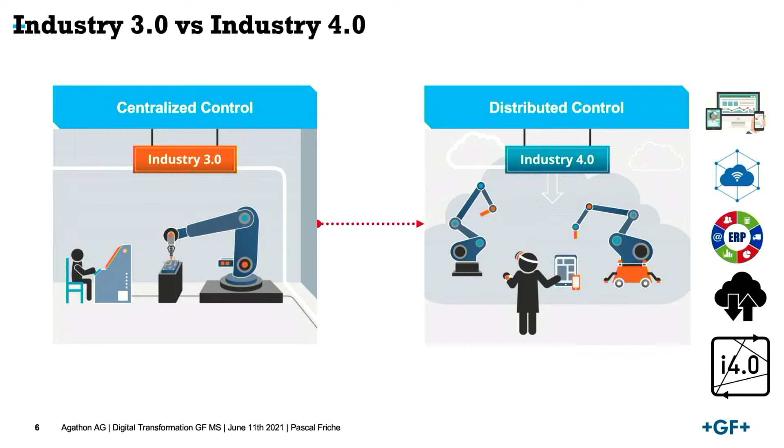To do that, we need, of course, to develop something. We need to have a transformation. So how do we stick to that, and how did we realize this transformation? We follow the norm RAMI, which is Reference Architecture Model Industry 4.0. The norm has been built in 2015 with 3 axes.

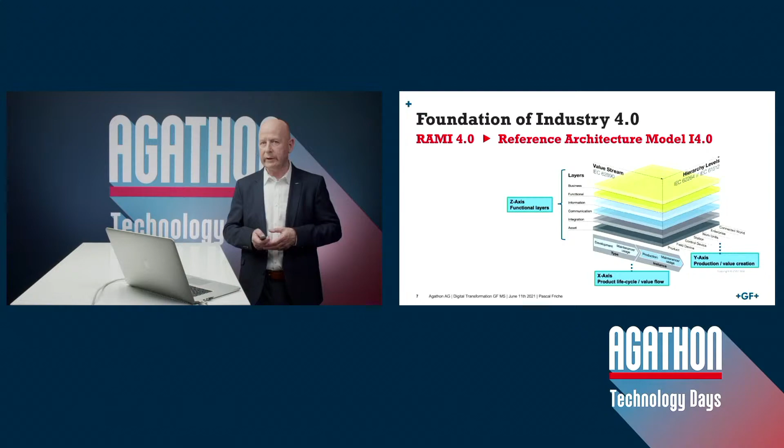We have on the Z-axis the functional layer, which is very important to GFMS. On the X-axis, we have the product life cycle. And on the Y-axis, we have the production axis. The functional layer helps us to build our IIoT stack. IIoT stands for Industrial Internet of Things. This is the architecture that we need to push data from the machine level up to a business application level.

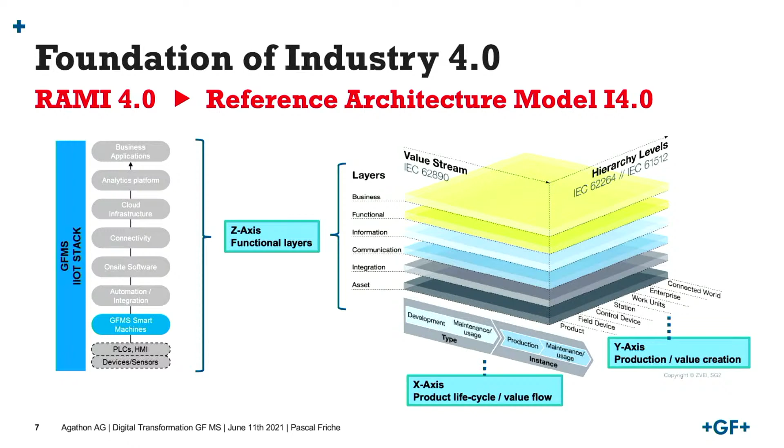When you build a house, you need a strong foundation. And GFMS did exactly this path. So firstly, we integrated on every single machine from mid-2017 what we call an rConnect box. Secondly, we moved ahead with a data standardization across all our technology, which makes GFMS unique in that sense. We chose OPC UA, which is a well-known format.

On top of that, the smart devices and smart sensors are also part of the game of the digital transformation. These 3 aspects make our machine smart and Industry 4.0 ready. What are the benefits for you, customers? First of all, the box inside our machine allows the customer to have an open connectivity and to connect his machine to the world. Secondly, OPC UA as a norm helps us to simplify the interface.

The smart devices and smart sensors are there to have real-time analysis. And of course, every customer who is using our technology would like to have a return on investment. And the data management and getting the data are the basis.

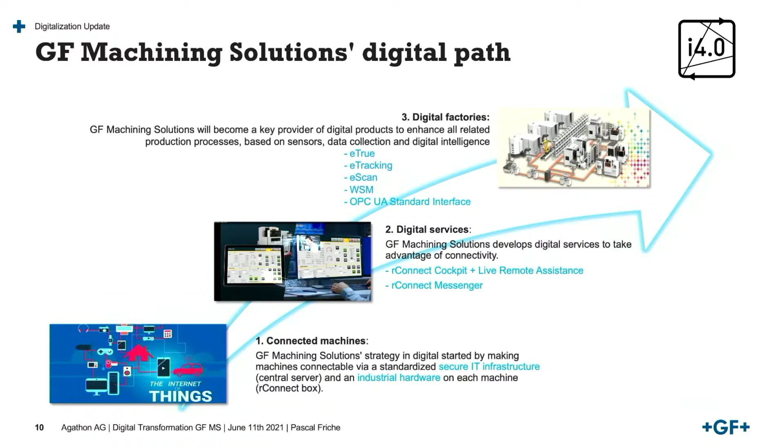When a customer is investing in our technology, it's a lot of money. And they would like to ensure better efficiency, to ensure the productivity. So how can we improve and increase this efficiency and productivity is most probably to understand how the machining is behaving. And how the machining is behaving, this is translated from the data analysis that the customer will use.

We do have 3 pillars in GFMS regarding the digital customer service, the augmented machine capabilities, how can we have capabilities from the machine that our customer purchased, and finally, how can we have a process integration and an optimization on those processes. And this is exactly what the software is delivering to our customer.

Let's talk about the digital services. How the mechanism and the solution work for our customer. The customer, in his own factory, can, through his intranet, have a customer cockpit. This customer cockpit offers some features to the customer. First, to get directly online with the HMI, the control panel of the machine, to be able to tune and to set some parameters. Secondly, the customer cockpit offers also to transfer files. For example, CAD/CAM files, firmware, software upgrades that may be needed.

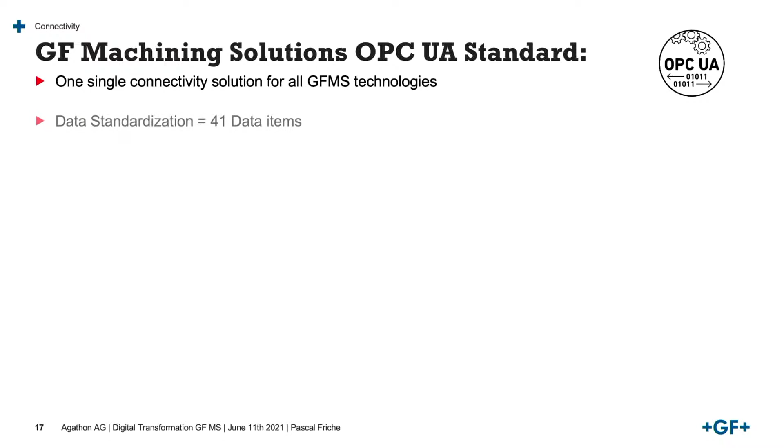As you can see, we have many different possibilities to connect the machine to diverse systems. And finally, what I would like to show you is that we deliver 41 data about machine identity, machine status, process information, error messages, and KPI measurement.

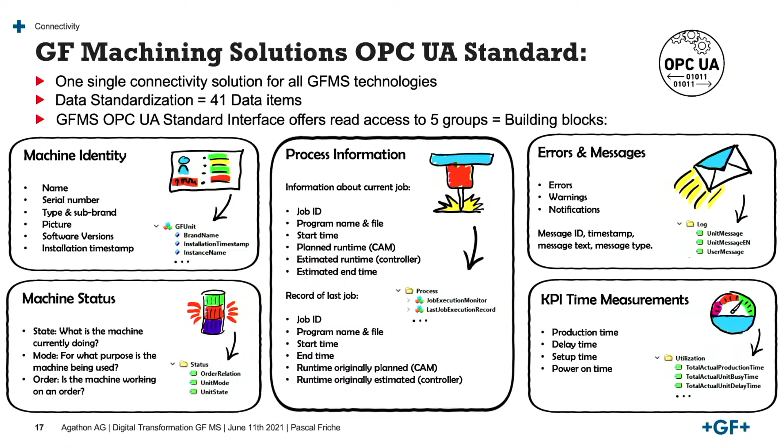As a wrap-up, the customer is looking for process accuracy, reduced lead time, to be compliant, fix the problem as soon as we can, integrate quality control, connect to MES or ERP systems, monitor the machine performance. This is just a summary of what you as a customer are looking for. So GF Machining Solutions is offering that, the connectivity; data are the new gold today, and everybody knows that. Then collaboration with cloud platforms.

This is the future for us as well, to offer web-based access. Servitization, the service becomes more and more important. Then the augmented machine capabilities, how can we twin that? And finally, to be also in the intelligent manufacturing world.

Our applications. Today we have a lot of possibilities to do nice things, so we can play with colors, with hot and warm colors. Then we have design, or production for jewelry. So you see the different processes we have, from small parts to large parts, like cockpits in trucks.

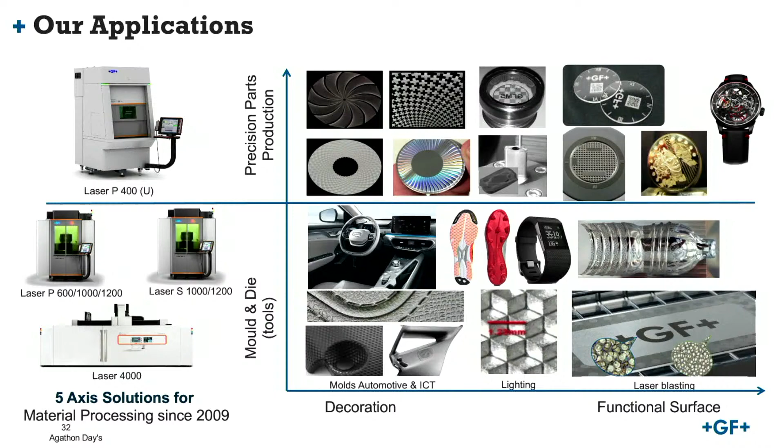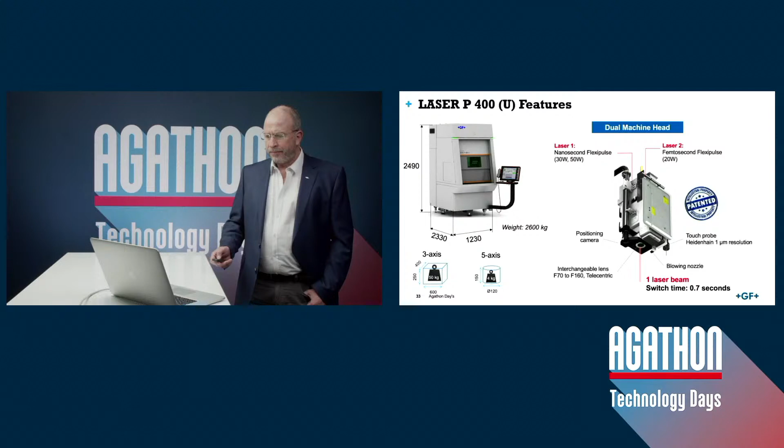On the Laser P 400U, for example, we have the dual machine head. It's a nanosecond source or a femtosecond FlexiPulse laser, and we have the possibility in the same process to switch from one source to the other in less than 1 second. We try to listen to the market, we want to be innovative. Our customers have to be innovative. We have special needs, for example, also in the optical market.

When we program some structures for the parts, we have several possibilities. If we go for 2 and 3-axis, we go directly with our CAM system Rhino 3D direct to the machine. If we have round parts or 5-axis parts, we go over the laser simulation so that we know exactly what happens when the machine is finished.

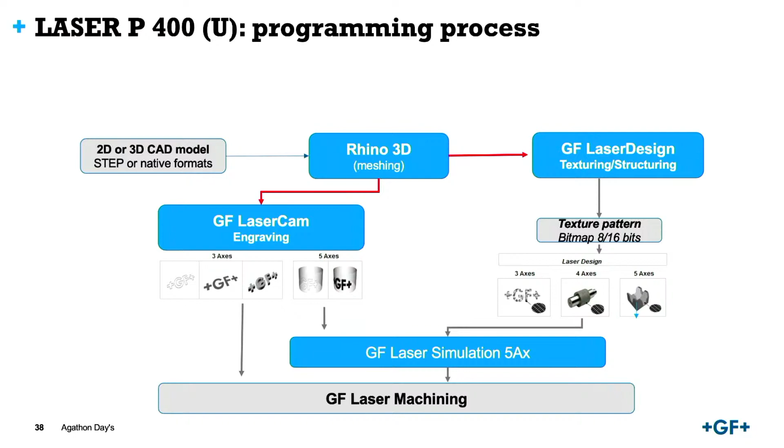Here are examples of the CAD data. Then we have the possibility to say which structure we want on which part. Then we go over to simulate. We have patch sizes. The patch is a very good system so that we have the part not split. If we move with the laser source in mechanical parts, we have to stop the process a little bit. And if we stop the process in the middle of a patch, it's not nice on the surface. So with the patch size, we have all parts exactly as we want. And then we make the simulation and go to machining.

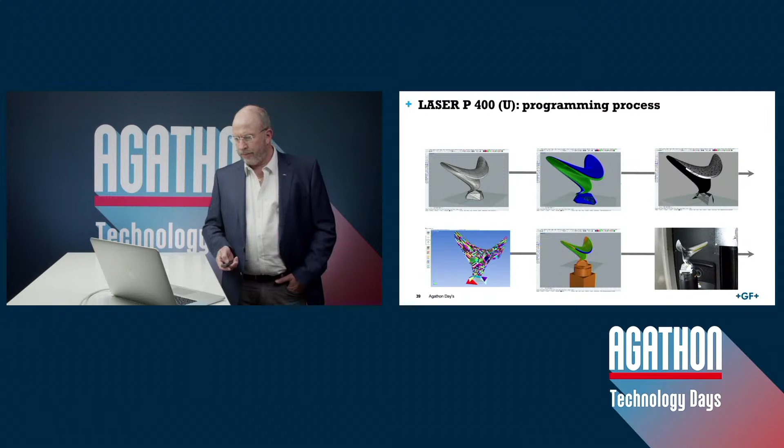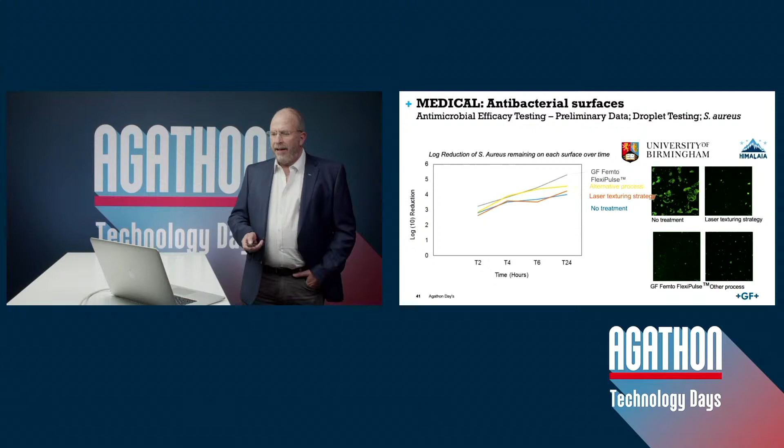All our laser machines also have pick and place automation with pallets or part by part. In medical, we have antibacterial surfaces. What's possible to produce: we have surfaces with no treatment, so it looks like this. You see the bacteria. Then you have competitor products, and our products with FlexiPulse. You see fewer particles on the surface, so it's very good for the implants.

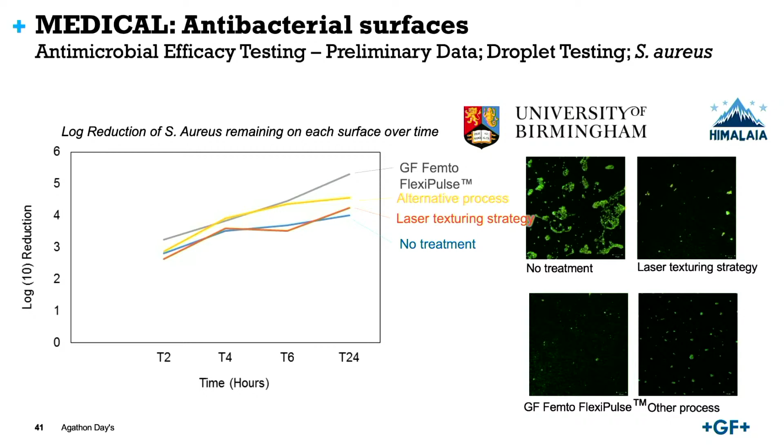A next thing is also to make an identification right in the part. You know sandblasting; we make laser blasting, and in this laser blasting we have the possibility to integrate some QR codes, some descriptions like the logo you see here. And it's only visible with a special application.

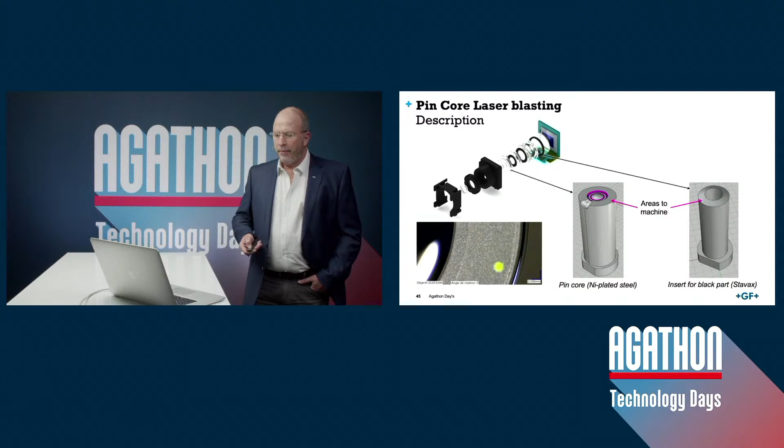Everybody has this part in the pocket: the camera of the mobile phone. The lens for the camera, for the zoom, is a very, very small part. So you see the possibilities we have to change, from every color to the size, big size, small size. And with our machine, we laser the marked areas, and this area has at the end a structure like this. It looks like sandblasting, but is laser blasting. If we look at the surface, the sandblasting surface looks like this. And if we do it with our machine, the structure is very homogeneous.

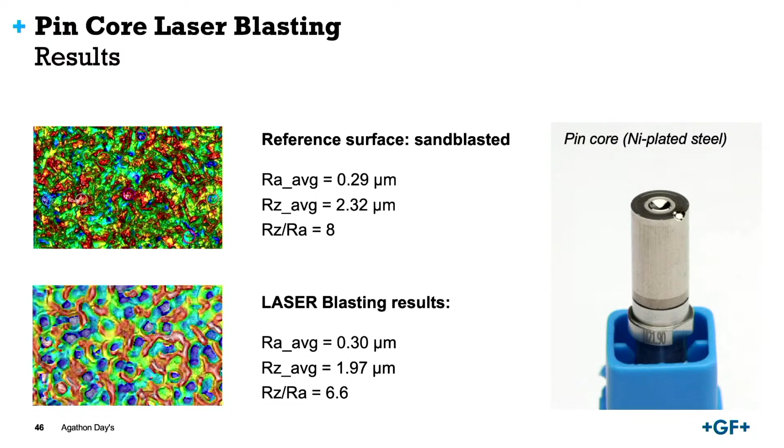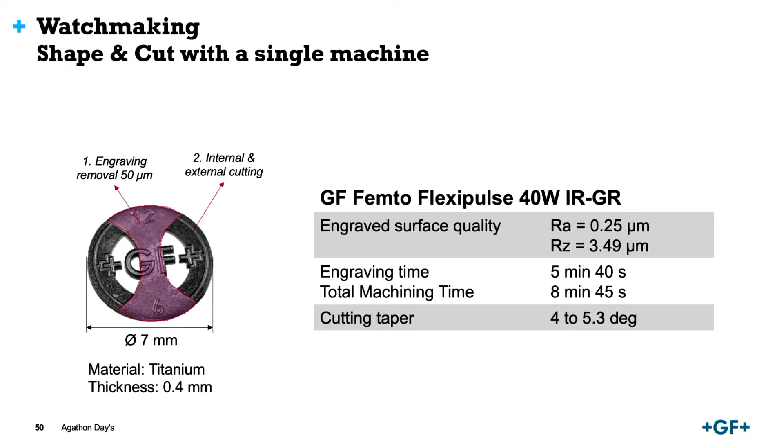With the machine, we also have the possibility to cut. It's not the first thing to do with this machine, but we have the possibility: here a part in titanium, and also a part in material from the jewelry industry. You see we have a depth of 50 microns, and we have straight walls with a cone of 5 degrees. Laser microcutting we do with our ML5 from Microlution. It's possible to cut within plus minus 1 micron and realize surface qualities below Ra 0.1.

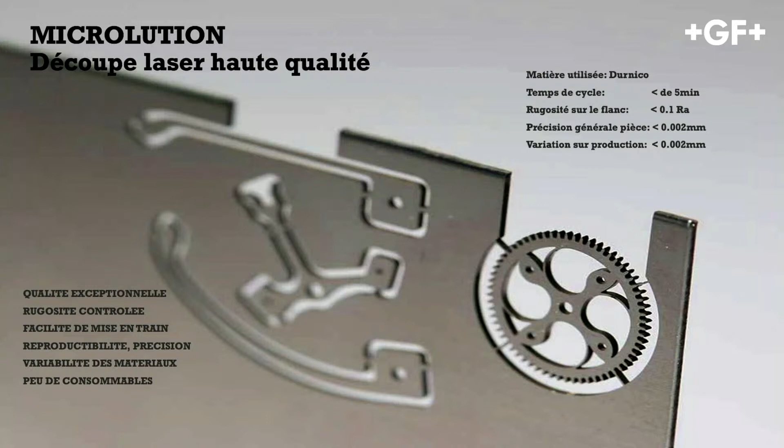A next machine type is additive manufacturing. We do this in GF Machining Solutions with the DMP Flex or Factory. Flex is for different materials, so you can easily change the material, the powder, while Factory has integrated cleaning of the powder, and we work on these machines with only one single powder. DMP 500 or 350 refers to the build space, the part size.

What's possible? Four challenges. The first is weight reduction. It's nearly impossible to cut, mill or grind, so we have the possibility to produce parts like this. Or lead time reduction: here we have a part with additive manufacturing, we are below 1 day, below 3 days, and normally it takes over 3 weeks to produce such parts. Function optimization is a possibility with this process, or mold improvement, heating and cooling with channels inside the form.

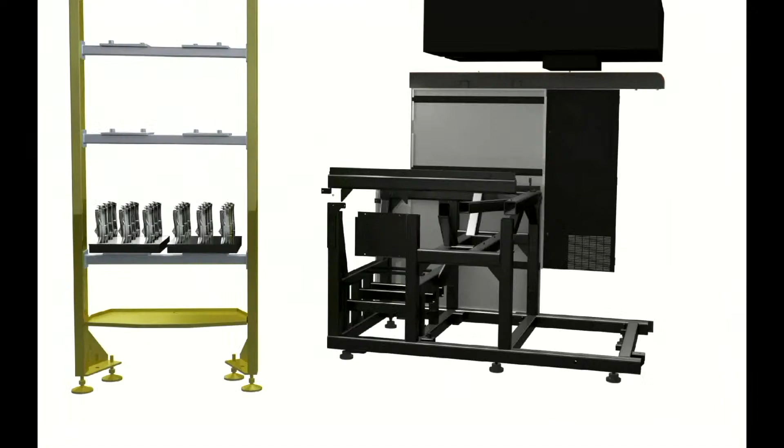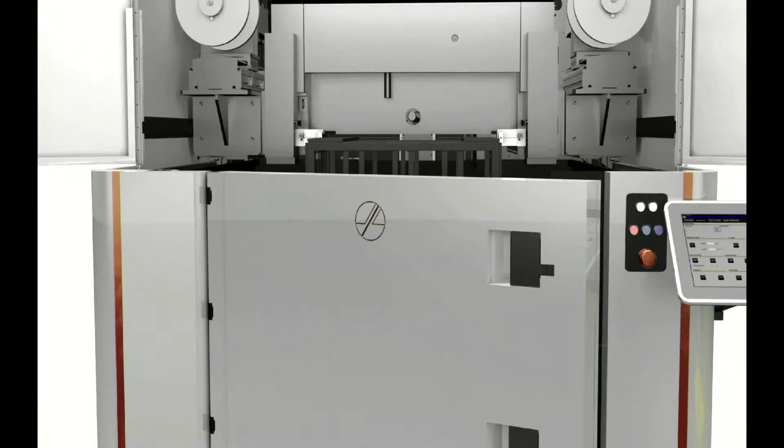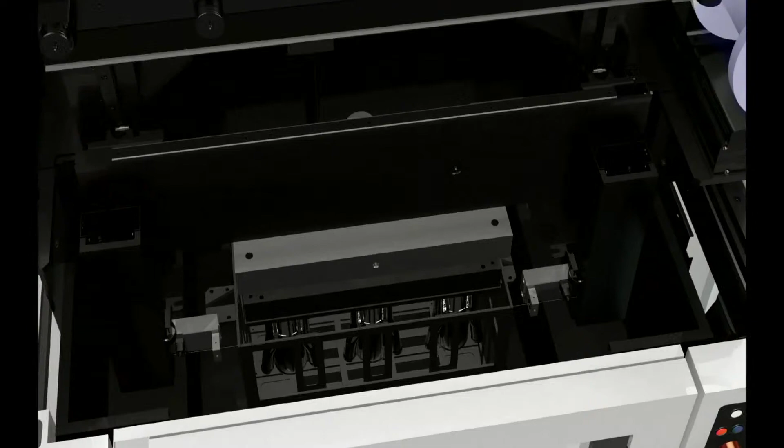The CUT AM500 is the machine to separate the parts we produce in additive manufacturing from the base plate. Every part is fixed on the bottom, and you have different possibilities to remove it, with a saw or by breaking, but it's always mechanical deformation, and it's not so good for special parts. So we put a cord over the parts, turn it around, and then cut the parts from the bottom with wire erosion.

I move over to EDM and EDM generators. So the two factories, Charmilles and Agie, produced these generators for a long time, and they grew up, so the speed was faster, and we went together into the development of generators in 2010, and then with the Tomeo generator we have the possibility to make the spark track.

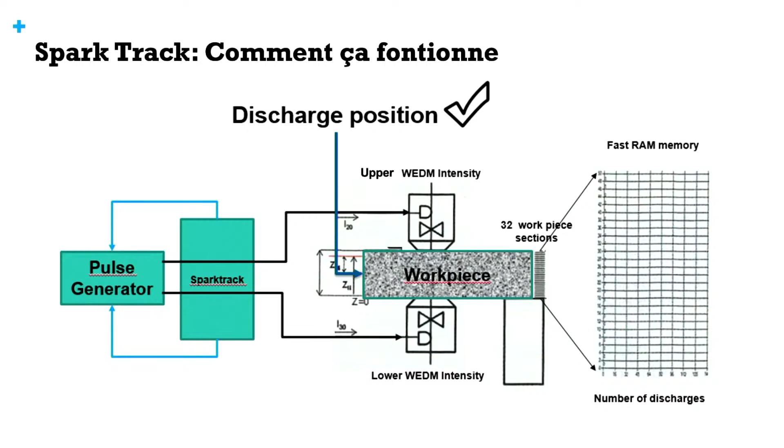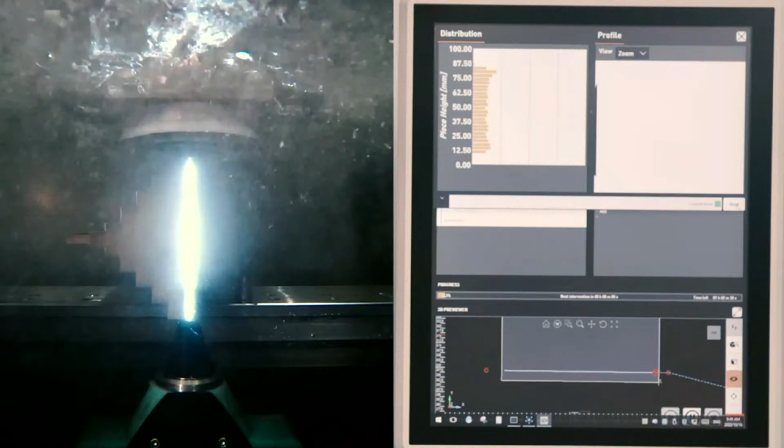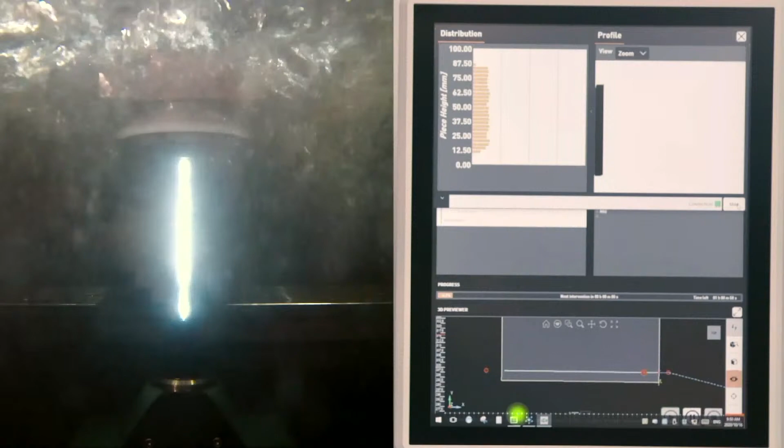Spark track, so we know exactly where the spark is jumping from the wire to the part. So with the spark track, between the pulse generator and the part, we know exactly where the spark is jumping. So we split, for example, the part in 32 levels, and then we can know exactly where we are. You see the part has different heights, and always big problems with broken wire. You see on the right side where we actually cut, and we have the part in real time too.

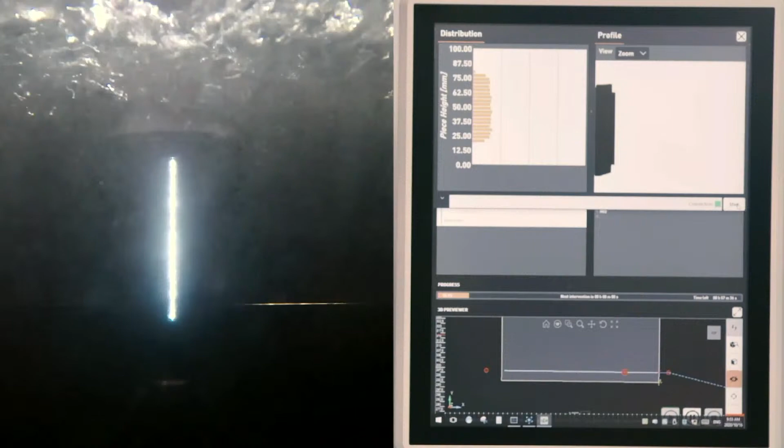And we have full power speed all the time, and the machine knows exactly when it has to take back the power to the wire. So you see the first level is done, and the machine is running with the same speed but with less power. You see it here. For every single part, we have the possibility to know where we are.

For example, this one was a test, but this one is real time, a real part. So you have these sections where you have to be very careful with the inserts, with the power, with the wire, so that you don't have broken wires.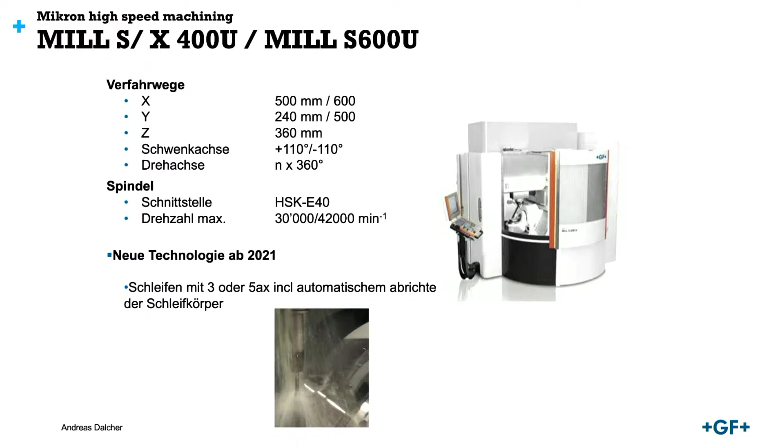A last thing is the milling. In milling, we have the Mill S and Mill X series. And the newest option we have this year is also grinding. Grinding of products directly on the milling machine is coming to sales in Q3, Q4 this year. So we also have the possibility to adjust the grinding body, so we know exactly the diameters and the possibilities.

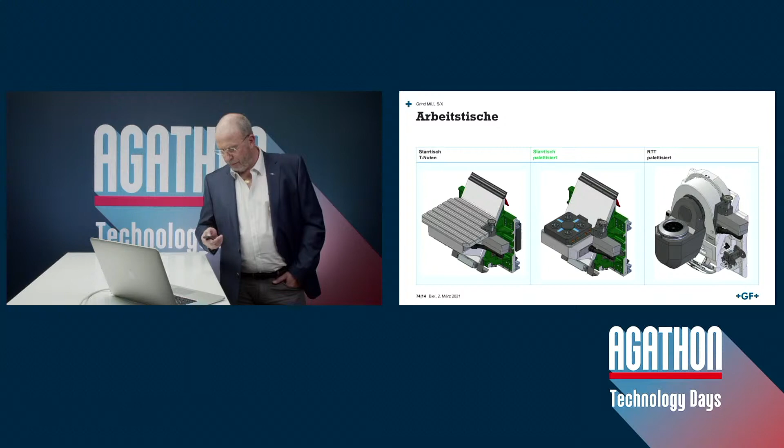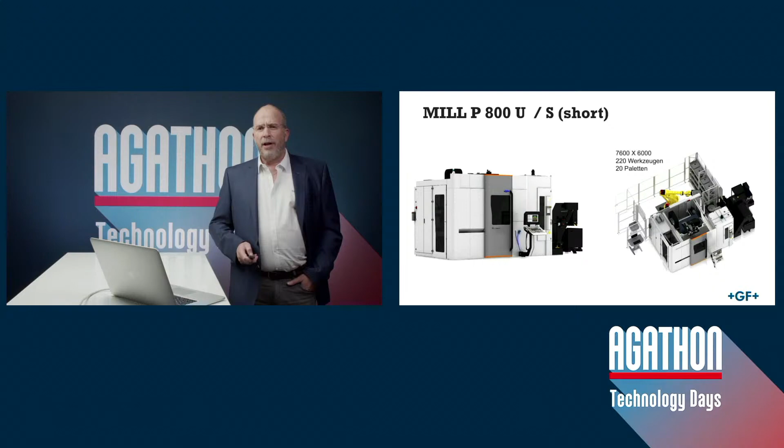And my last one is the Mill P800U. It's a machine with new options, but a very important thing is we have here a machine with travel of 800 by 800 millimeters. We have 220 tools. We have 20 pallets for work parts, and we need no more than 7.6 meters by 6 meters. So low floor space needed, and that's a big benefit. Space is money.

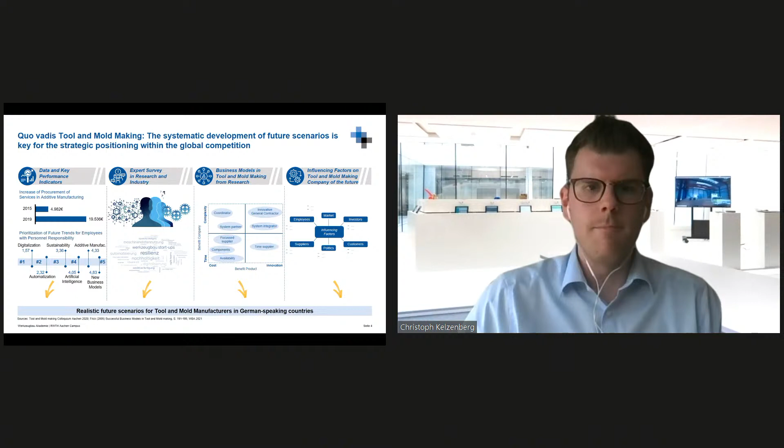But before I do that, I would like to outline here that this kind of scenario technique usually integrates a so-called scenario funnel, which basically illustrates the timeline from today to the future. Of course, we have some uncertainties when we talk about the branch itself, but also when we talk about these future scenarios. They do vary in their occurrence, of course.

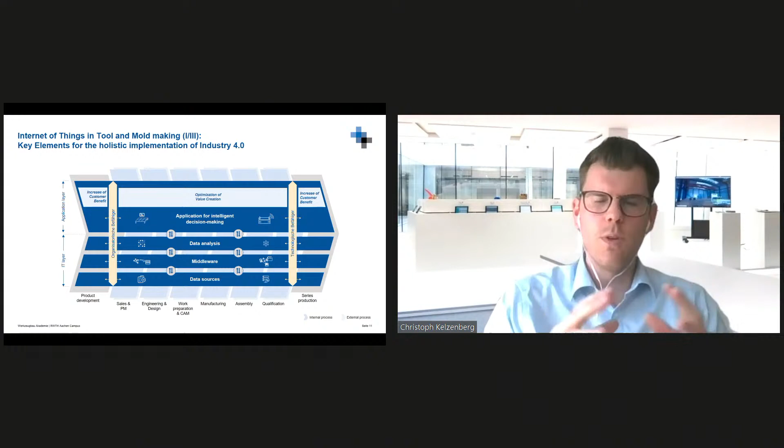Of course, you might have some minor benefits if you have 1 or 2 apps or 1 or 2 single solutions. You need to connect them. As you remember, scenario 3, highly automated tool and mold manufacturer. And this high automation is not only focusing on manufacturing, but on each and every process step. So the holistic approach is very, very important. That should be my key message to end my speech.

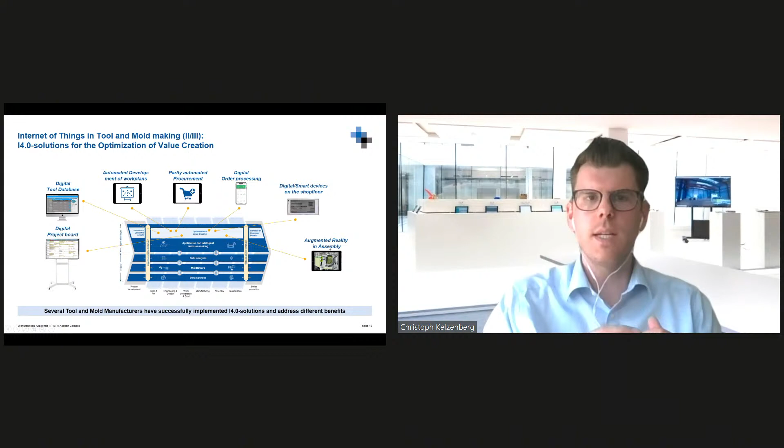We know different solutions in different tool shops. Even in our tool shop, we have developed and integrated some solutions on digital project boards, digital tool databases, how to automatically develop work plans, how to procure automatically, how to use AR in the assembly process. And we know companies that use Industry 4.0 to increase the customer benefit, such as Schneider Form, who are able to reduce the qualification of their tools significantly because they use the data from the tryout and qualification process. We know the Audi tool shop, who have implemented intelligent tools which adjust in real time in their series production processes.

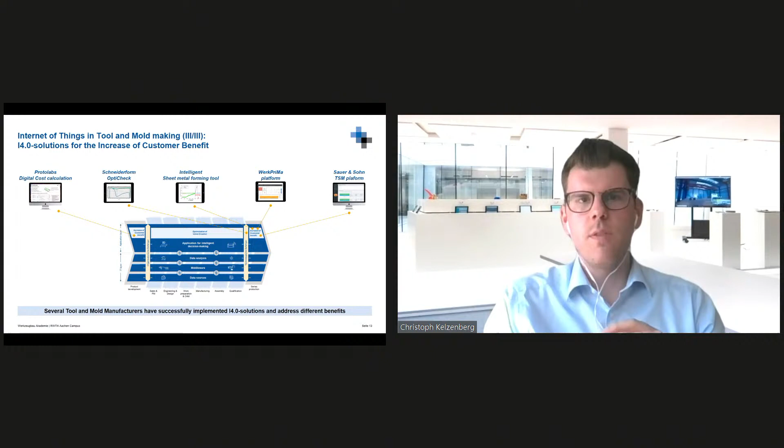So as time is running, as always, we have a lot of different solutions. You as a tool shop, if you would like to remain in business, especially in German-speaking companies, make sure to tackle Industry 4.0 to the fullest.